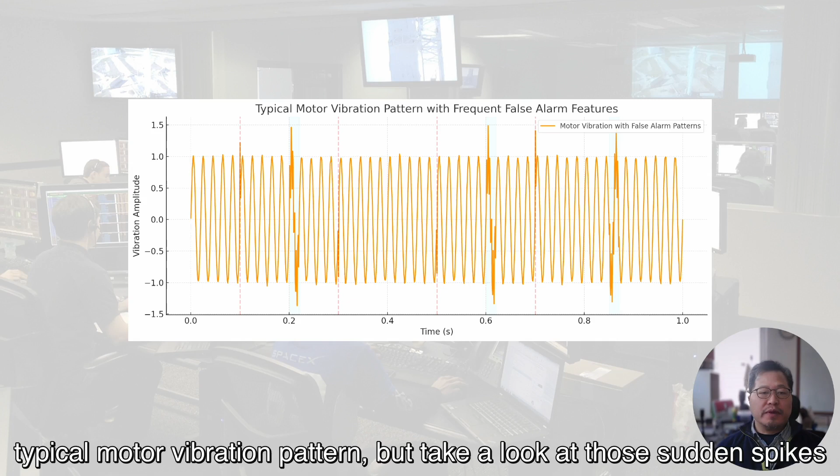The graph you are looking at shows typical motor vibration patterns, but take a look at those sudden spikes sticking out here and there. We call these spikes; they are abrupt surges in the signal. The motor's vibrations usually follow a clean, periodic waveform. But from time to time, these spikes appear.

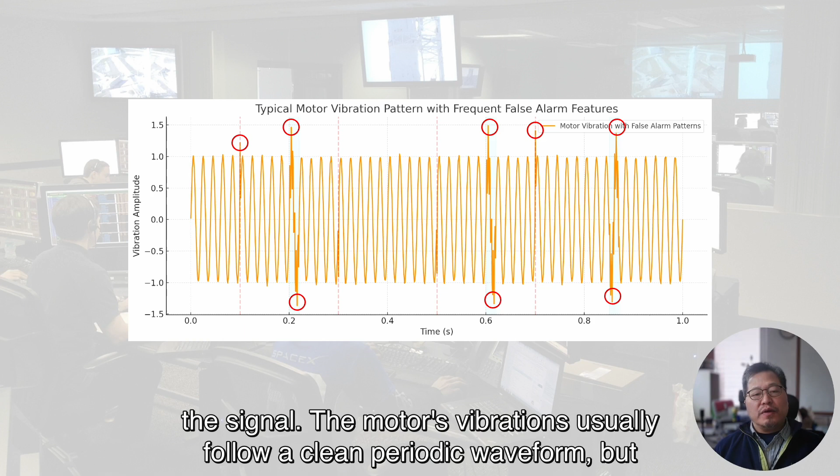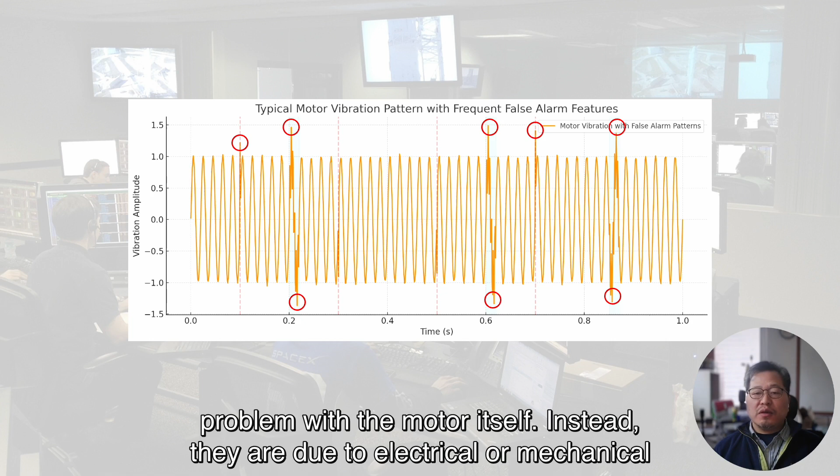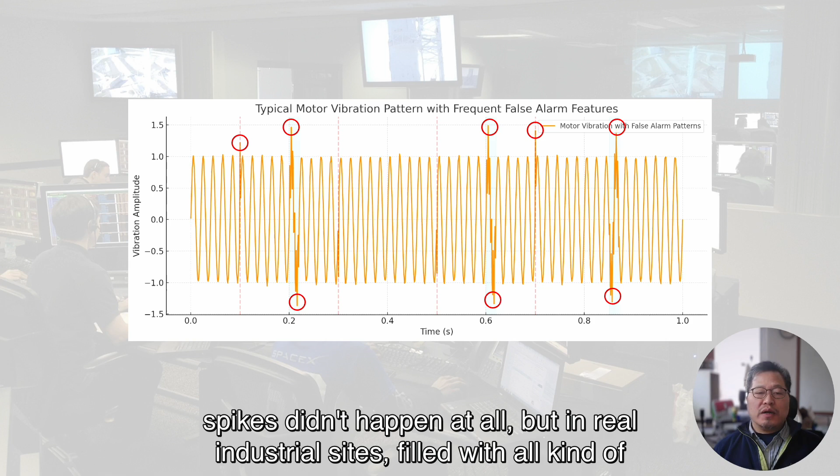In most cases, they are not caused by a problem with the motor itself. Instead, they are due to electrical or mechanical noises in the surrounding environments. Of course, it would be great if these spikes didn't happen at all. But in real industrial sites, filled with all kinds of electrical and mechanical equipment, they are practically unavoidable.

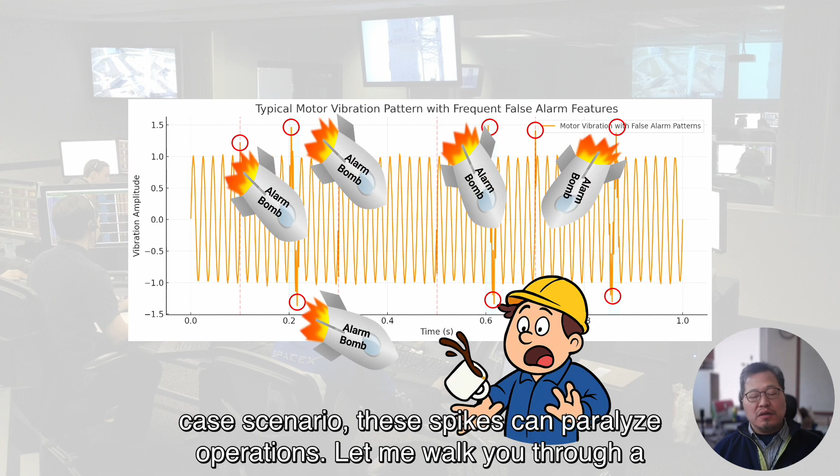In the worst-case scenario, these spikes can paralyze operations. Let me walk you through a live demo to show you exactly what I mean. What you see here is a typical simulation of motor vibration data.

It would be great if the signal stayed smooth like this, but in reality, spikes can occur due to nearby high-voltage cables, welding activities, or even sudden physical impacts on the motor. In this situation, a traditional alarm system may trigger numeric alarms.

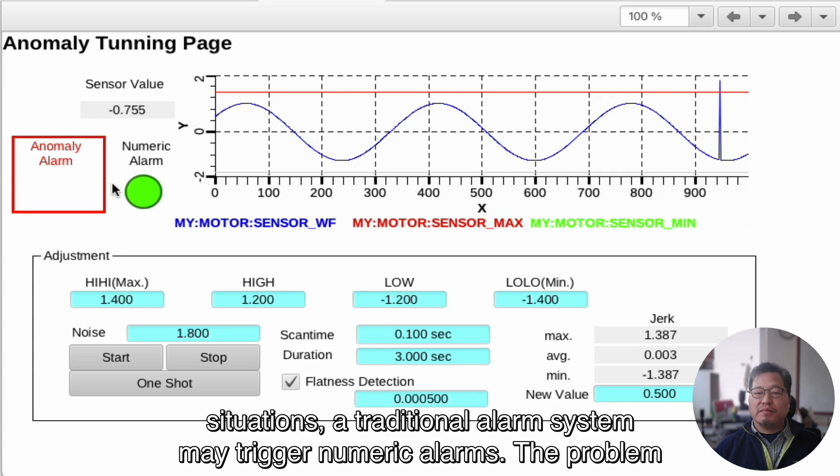The problem arises when these alarms occur too frequently in a short time. This can disrupt the equipment operation and, of course, production as well. Because in most cases, when technicians investigate these alarms and actually disassemble the motor for maintenance, they find nothing wrong.

Stopping the equipment just to check false alarms leads to unnecessary downtime. And yet, you can't just turn off the alarm either. It's a frustrating situation. In fact, some sites do end up disabling their alarms entirely.

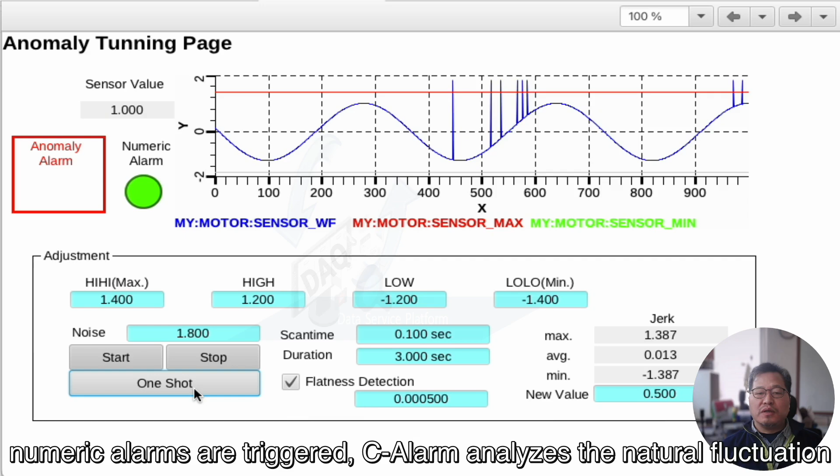But now, you don't have to worry about false alarms anymore. C-Alarm by Cnix is here to protect your rest time. Take a look at the red anomaly alarm on the left. Even when traditional numeric alarms are triggered, C-Alarm analyzes the natural fluctuation patterns of the data.

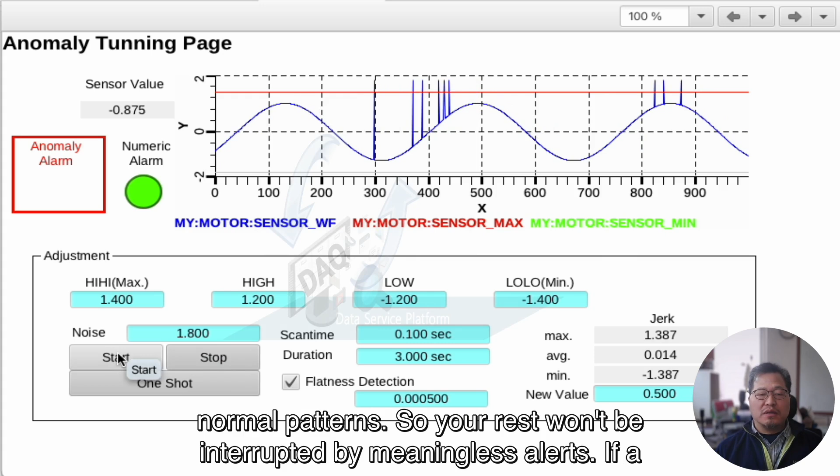It filters out short-lived, sharp spikes that deviate from normal patterns, so your rest won't be interrupted by meaningless alerts. If a spike-like signal persists over time, the alarm interprets it as a potential anomaly and generates an anomaly alarm, since it may indicate an actual issue.

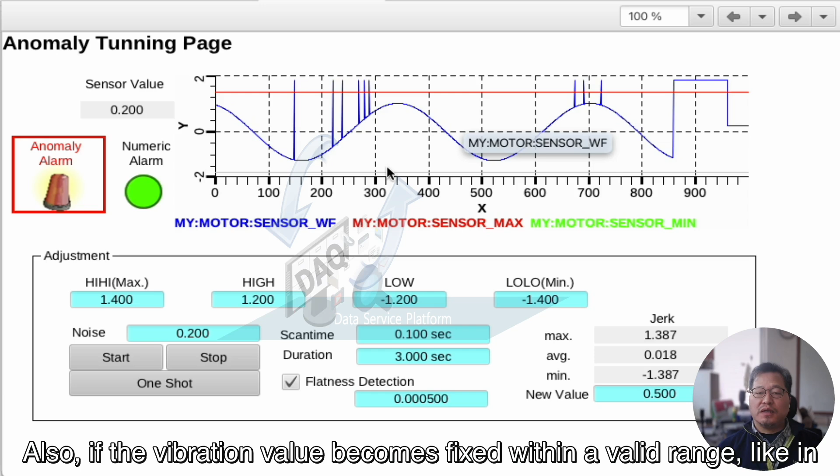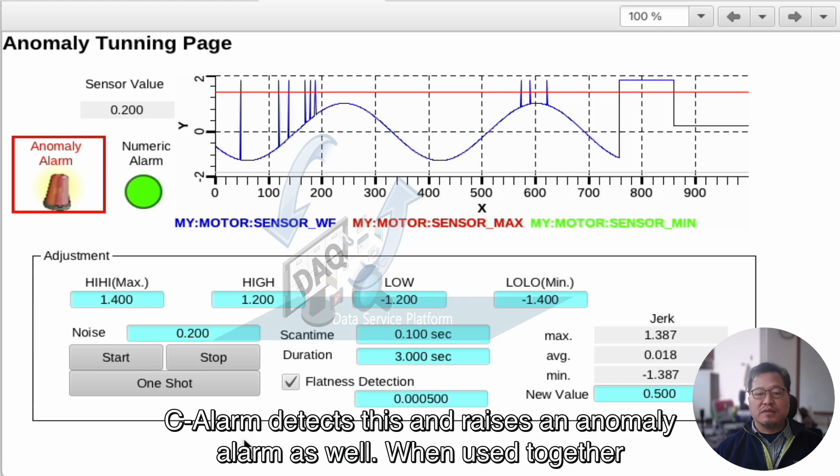Also, if the vibration value becomes fixed within a valid range, like in cases of sensor failure or line short, where there's almost no data variation, C-Alarm detects this and raises an anomaly alarm as well.

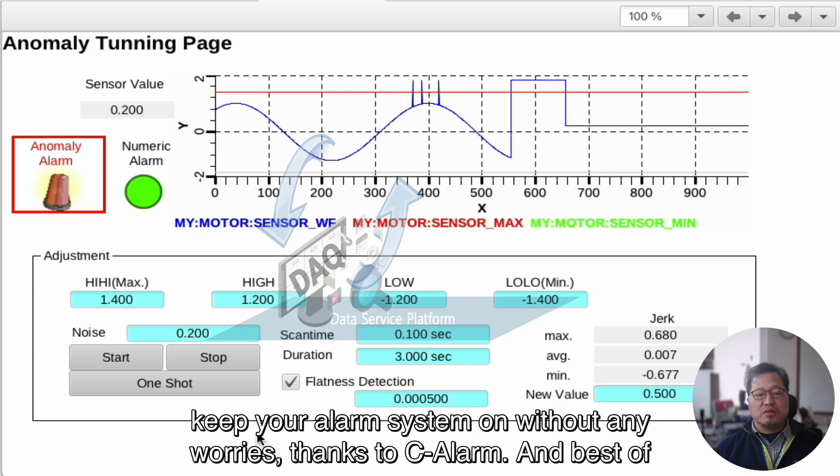When used together with the Cnix DAQ system, C-Alarm can store and serve the waveform data around each alarm event, making post-analysis easy. So from now on, you can keep your alarm system on without any worries, thanks to C-Alarm. And best of all, it doesn't even require a GPU.